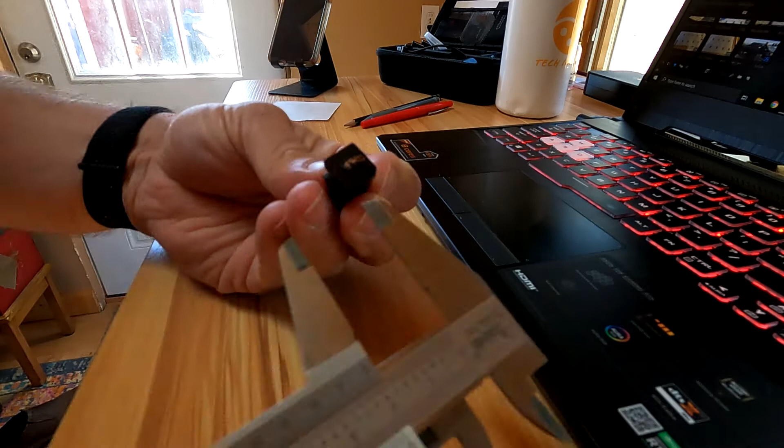Gonna try something a little bit different in Fusion 360. And we'll do both angles. All right, let's get to drawing. First things first, we will create a new project. We'll call it Miscellaneous Repairs, because we're probably gonna have more. Insert those pictures we took, which is called a canvas. And we'll get those in there.

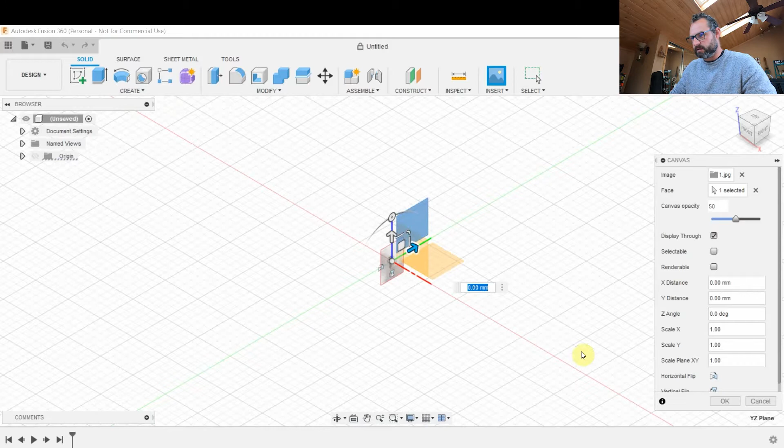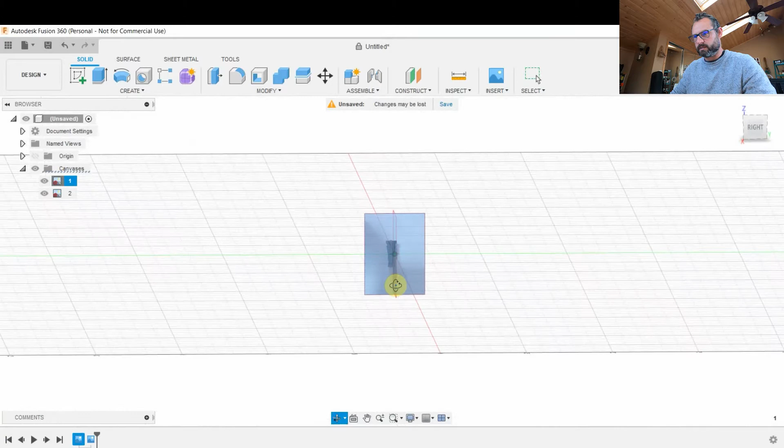Put that one on this plane. And let's go ahead and leave that where it is. And then let's insert the other one. Again, this will give us our profile here so that we have something to work on. So the first thing we'll do with these is calibrate. And we're working with this one here. So we know that the whole thing is about 31 millimeters. So we'll calibrate that one, and then we also need to calibrate this one, 31 millimeters.

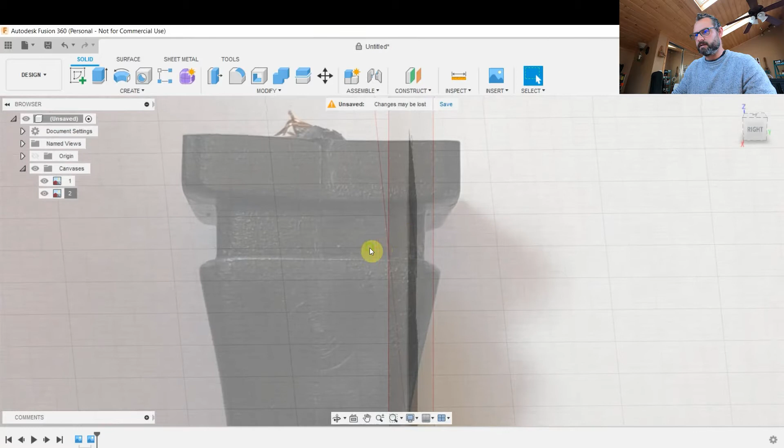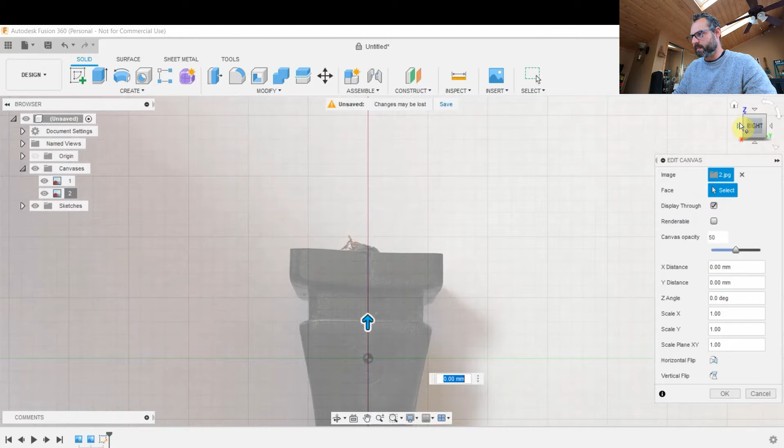All right, so let's see how well these line up with one another. Pretty close. Let's go ahead and move this one. There, that ought to do it. So then after that, what we want to do is we want to center this guy a little bit, and we'll use that dot as a reference. And then same thing here. We'll center this one. Again, kind of using this area as a reference. There, that looks better.

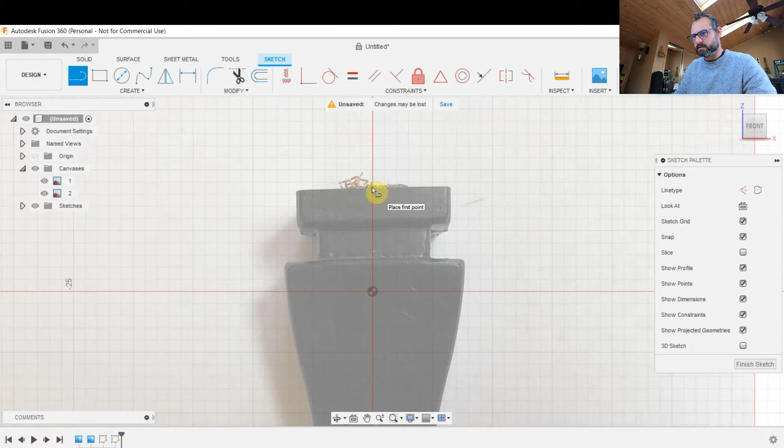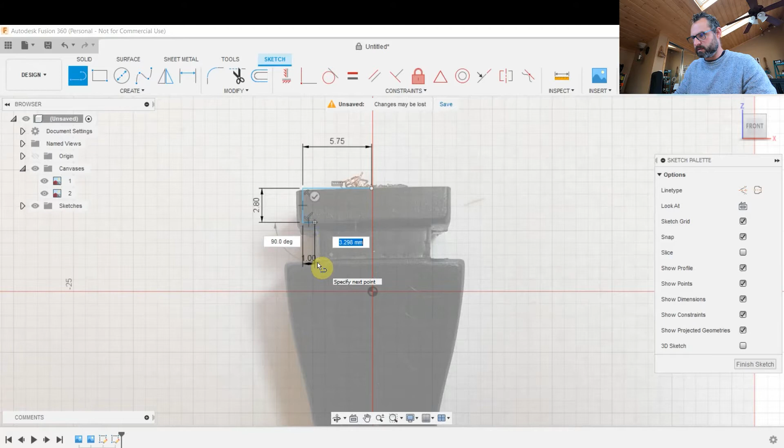All right, so let's get the sketch going. We're going to create a sketch on this surface. So we'll start by tracing this guy here, and we know this should be about 5.75. We'll go down. We know that's 2.8. And then this only goes back a millimeter. And this will go down 2.7. And then we'll finish the whole thing there. Back to the center line. And this will close our sketch.

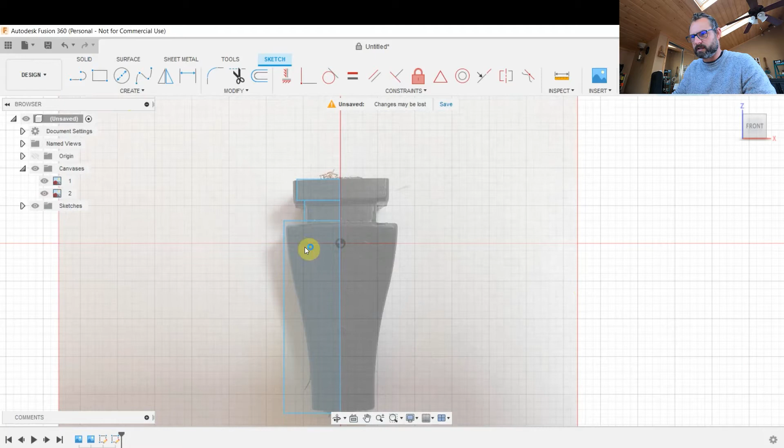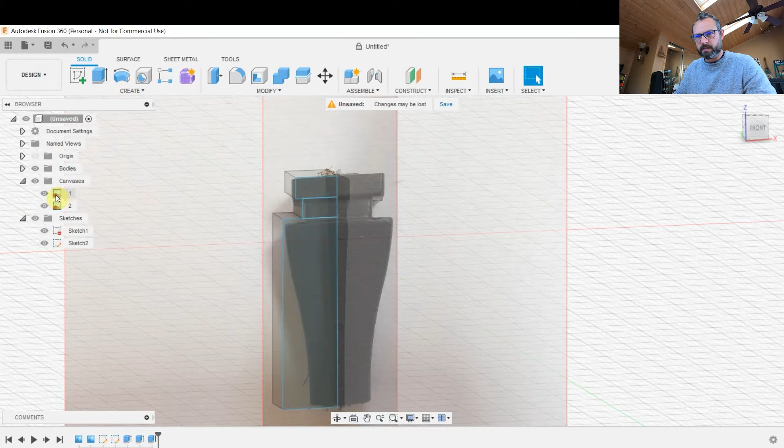We want to close this off because we'll have 3 different extrusion lengths. So that'll close it off. It'll give us kind of 3 separate sections to extrude. So let's extrude this one out. And that one will be 5.75. This one will be 4.75. And then this one will be 5.5. All right. So if we turn those off, we can now see we've got a rough shape of what we're looking at. So let's turn these canvases back on.

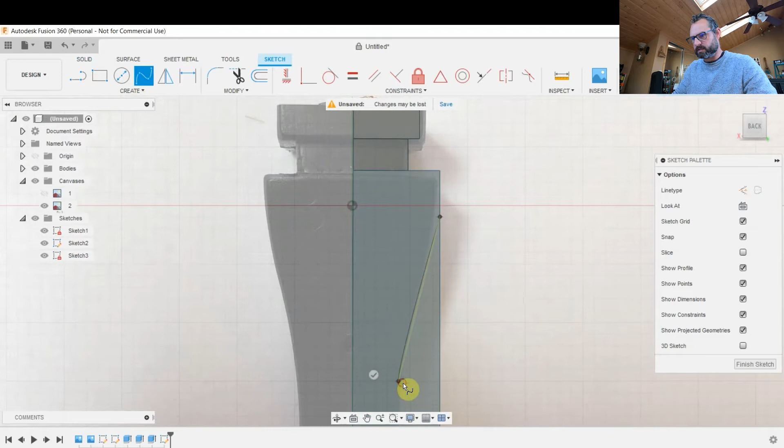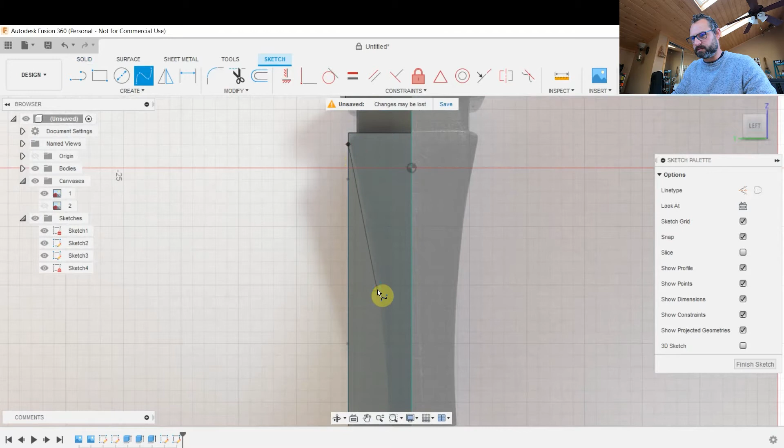We're going to sketch these profiles now. All right, so we'll create sketch on this face, and we'll start right there, and we're just going to get a rough shape. This doesn't need to be a science. So we'll get that one. So now we have 2 bodies here. And then we're going to sketch on this face here, this contour, or profile, if you will. Again, so now we have the 2 bodies there. So we'll extrude those.

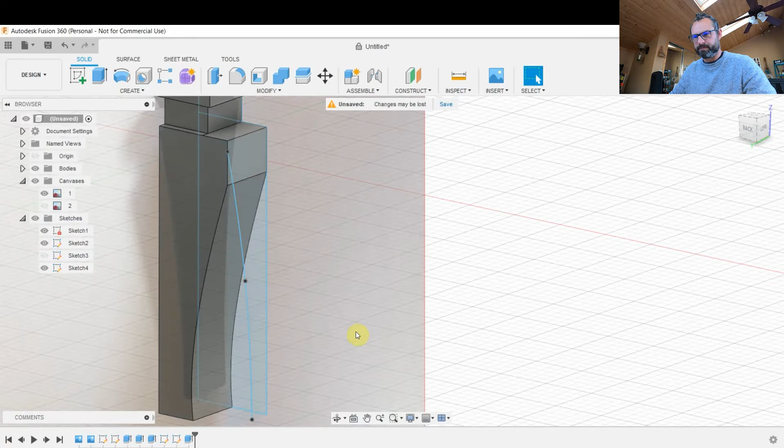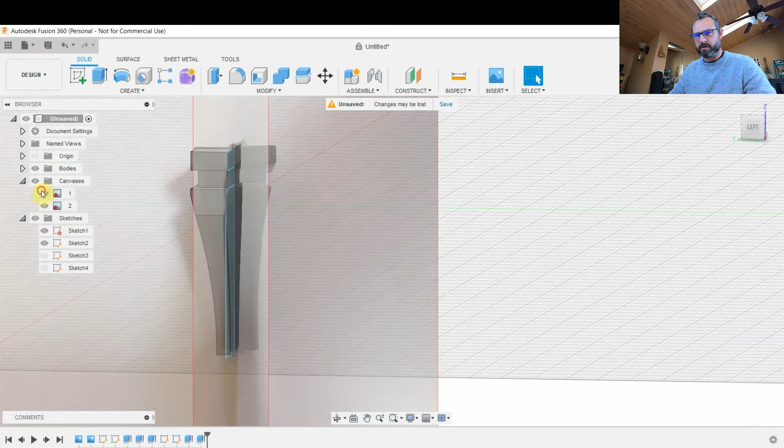Which will be a cut. I'm going to go this way. We're going to say all, and that'll be a cut. So then we get that shape there. And then we'll take this other sketch and do the same thing. We'll extrude that. It'll be a cut. We'll say all and click OK. So now we're starting to get the main gist of the shape going. So you can kind of see we have that profile there.

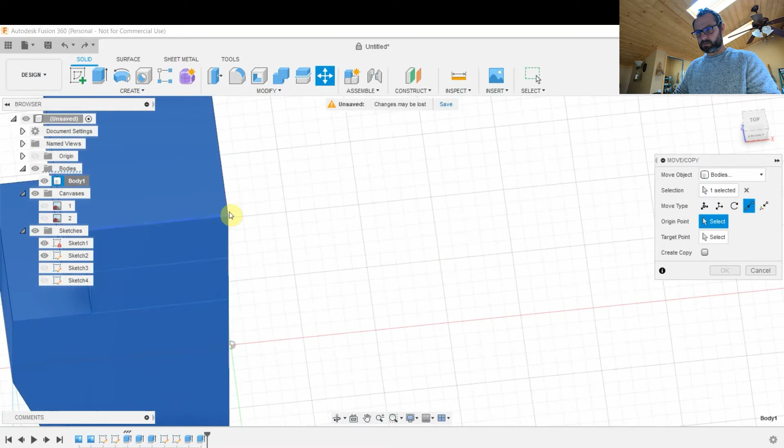Okay, so we'll inspect the body, make sure everything's fit to the lines so we can go ahead and mirror it and the two bodies will be joined. So it looks like it's on the green axis and the red axis, but it looks like it's off the blue a little bit. So we're going to go ahead and clean that up. And we're just going to say move, and we're going to say body. And we're going to do a point-to-point move. So the origin point will be here, and then the target point will be there. So that gets us right on the line. So when we go ahead and mirror this, we'll have the two bodies next to one another.

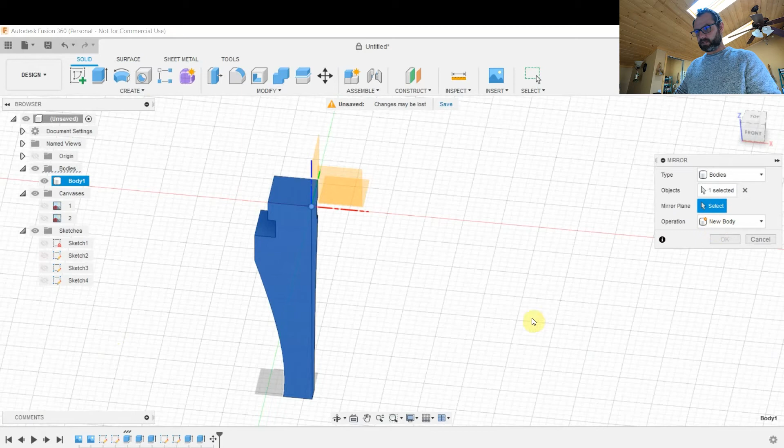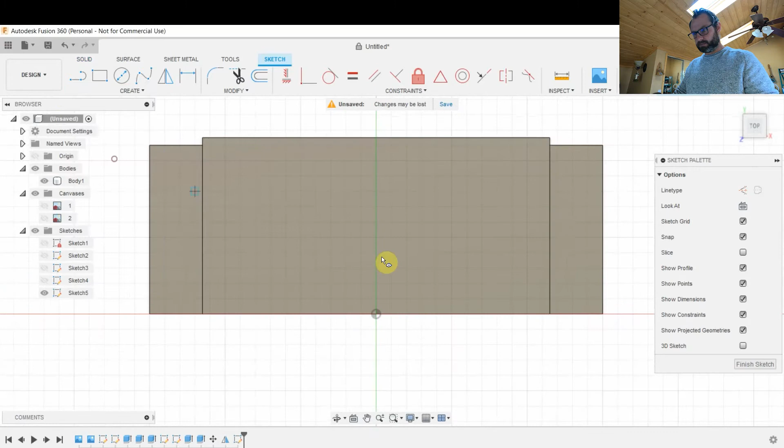So we'll turn these sketches off, and we're going to say create, mirror. We're going to mirror a body, this one here, and then the mirror plane, we're going to do it on that. All right, so now you can see we have half of the object. That's how we'll print it, so we can glue it together. But we do need to add in the section for the wires. So we're going to say create sketch, and we're going to work on this plane here. And we're already on the center, so we'll create an ellipse 3 millimeters out, and we'll do it 6 millimeters wide.

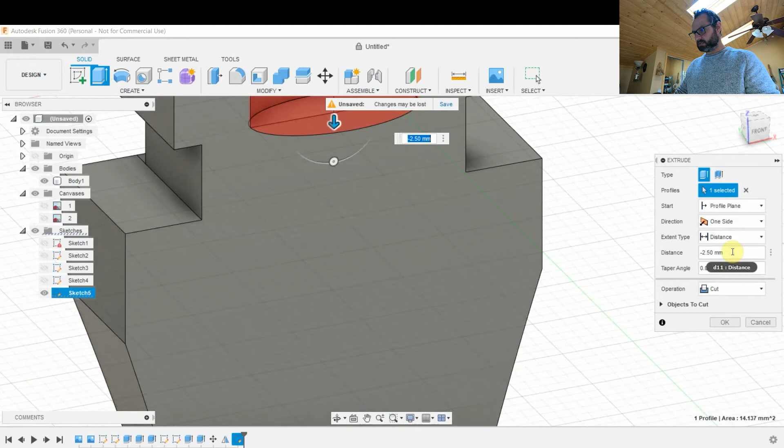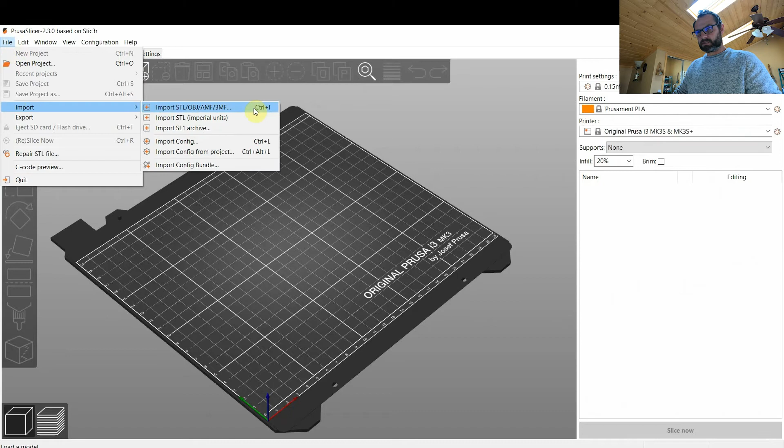All right, so we'll take this sketch and we'll extrude this through the shape, and it will cut it all the way. So we're going to say distance all, and click OK. All right, so there's our channel for our wire. Save as an STL, and we will import this into our slicer software. And we can get this set up for 3D printing and export the G-code. So we'll say import STL. There's our body. And the way we want to print this will be on a flat surface there. We'll copy it, so then we can move it so it's next to this one here, and then we'll rotate and get them pretty well centered.

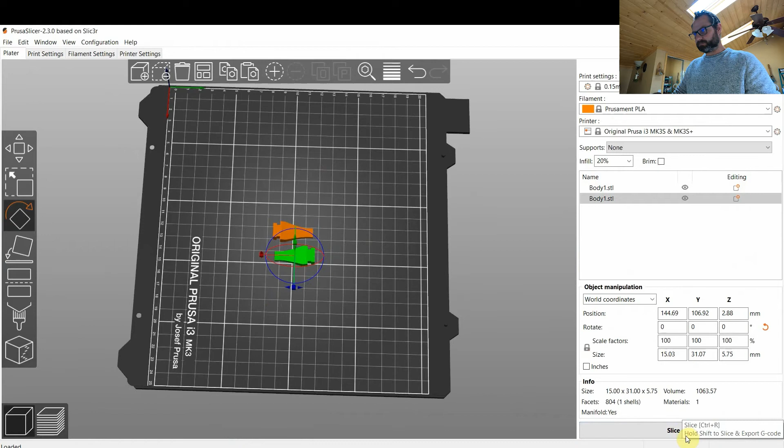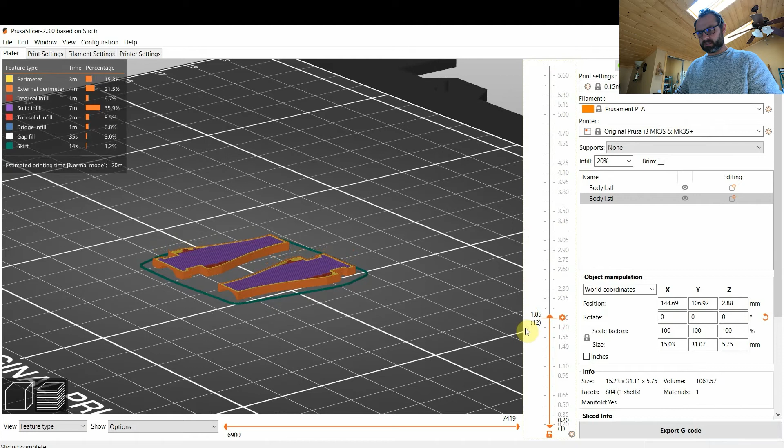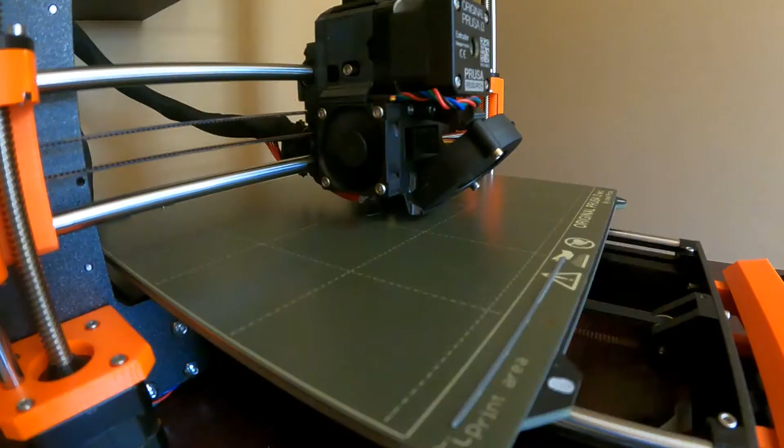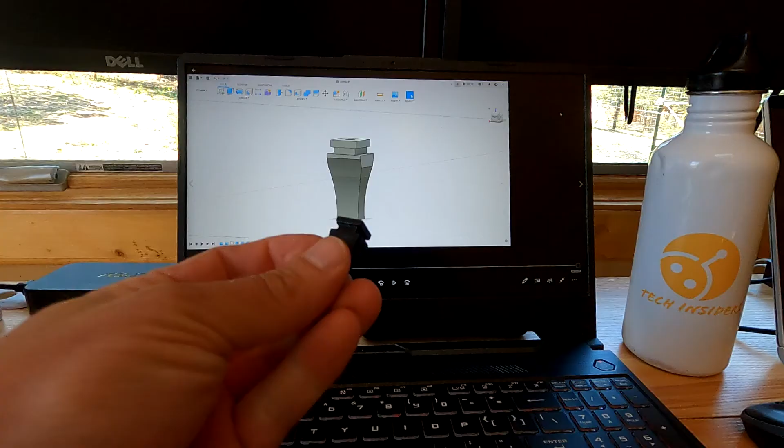All right, so we'll slice this now. We're going to use the 0.15 millimeter speed. And what's great about this is we can actually see how this will print layer by layer. So you can see we're going to have kind of a stacked series to give us that profile, which is all right. It's not perfect, but this is just a repair, so we don't have to do fine detail. We have a small bridge here, and 3D printers tend to handle these pretty well. So we can kind of see how the tool path will work there on that layer with the bridge. So let's go ahead and export the G-code. It'll take about 20 minutes to print, and we'll go ahead and print. Here's the original, and here are the two components printed together.

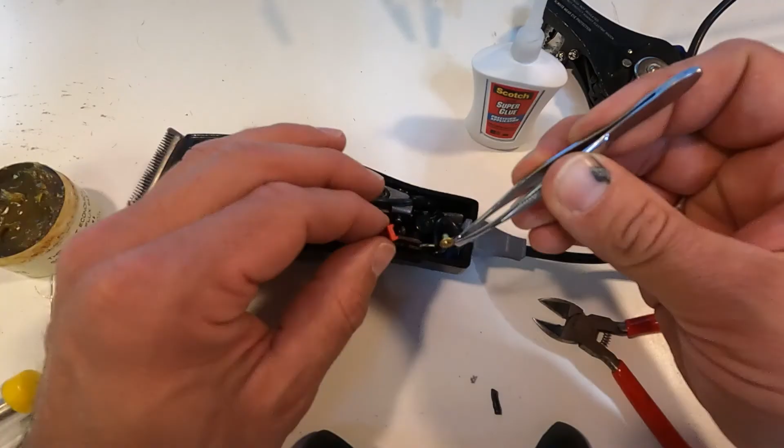Moment of truth. On, off, on, off. Look at that. And it's not frayed anymore. All right. Maybe I can get a haircut.